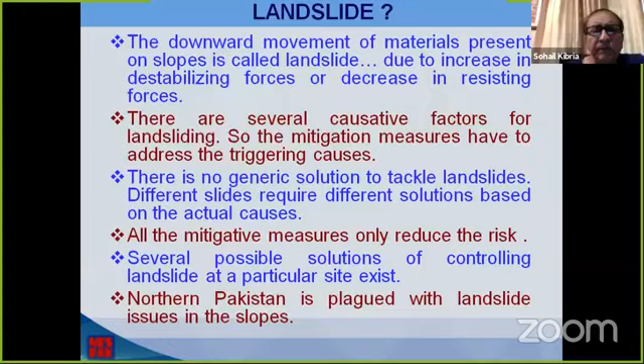In soils, the resistance is composed of the force normal to the plane. In soils, we have some additional component because of the cohesion in soils also - the soils which are cohesive also take part. In a nutshell, we call the interplay of cohesion and angle of internal friction as shearing resistance.

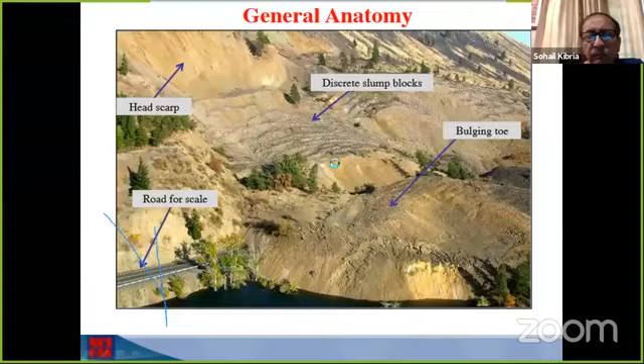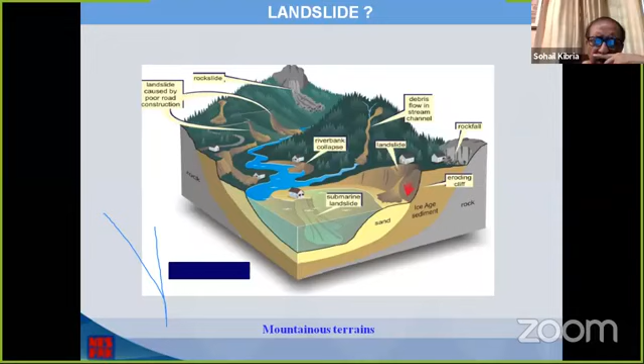Here you see debris flow, in which the moisture content is fairly high. It could contain coarse particles or finer material, or a combination of the two. It is possible in both cases, but the moisture has to be very high.

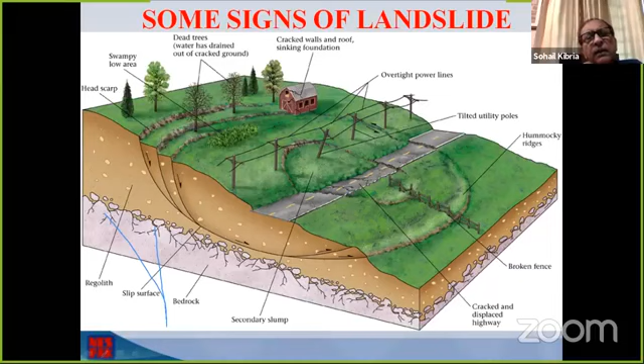So here you see rock, with soil material, alluvium or colluvium above it. This is technically called regolith, along with the slip planes, etc. This is a very brief summary of how we can identify slides at the site.

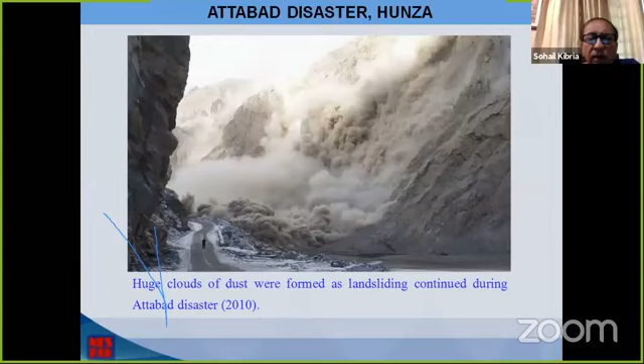In this slide you see a disaster which happened back in 2010 at Attabad. Huge clouds of dust were formed due to landsliding in the Hunza River, and the river was literally blocked, resulting in formation of a big lake. Later, some sliding also took place again in 2019.

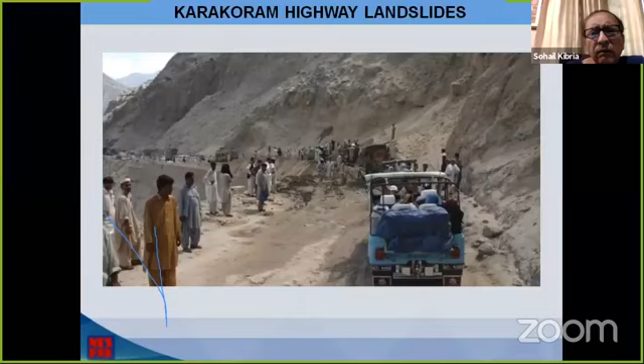Along the Karakoram Highway, which is hundreds of kilometers long, 900 kilometers long, starting from the low point, some landslide areas are very long, very complex and complicated. Some areas are kilometers and kilometers long, and the sliding takes place in long reaches there.

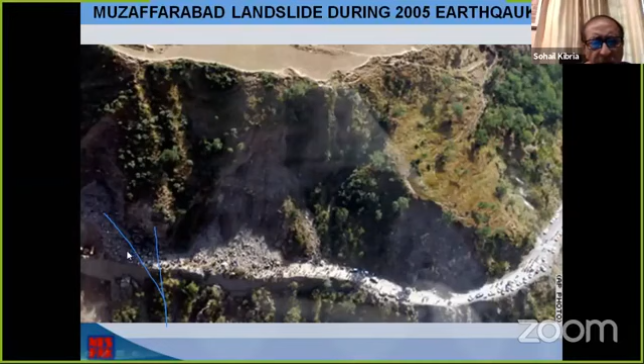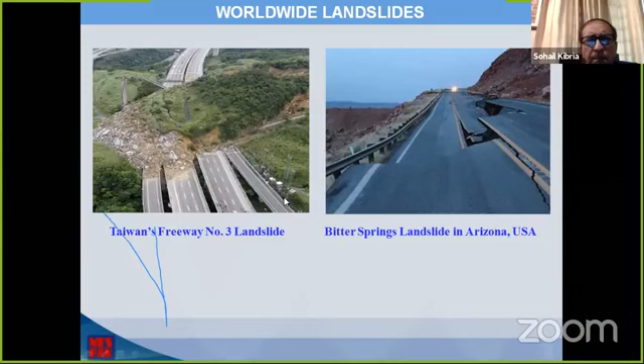If we look at the global index of fatality of landslide globally, we can very easily see that here, this is Asia, this is India, this is Pakistan, and here you see.

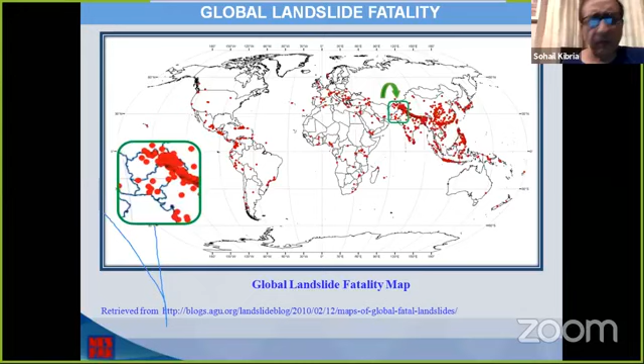Here is a status which was gathered in 2010 comparing the number of fatal landslides in 20 or 25 countries. So Pakistan is number 6 here. In the global fatality status, we are number 6. Number 1 is India. China, Nepal, although a small country, you can see it is having very weak rocks and very weak geology. So for that reason, this is a highly seismic, highly landslide area, and a lot of sliding takes place because of seismicity also. But that is only one factor.

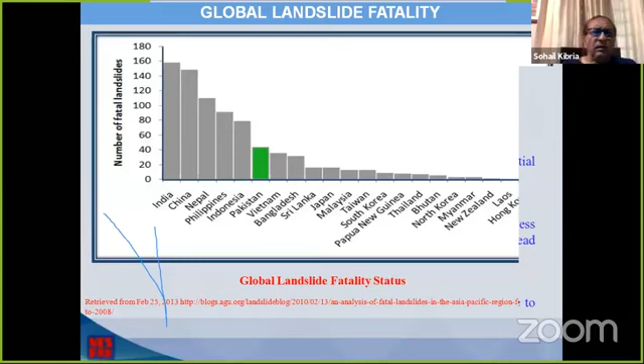So just talking of it, it's not a new issue. It is an old issue. And so many theories have been developed, and so many cases are there in the literature. And every time some new sliding takes place, we have a learning lesson. There are now ways and means, protocols for investigating the landslide, for studying them, for analyzing them, and for giving good solutions. There's a lot of improvement in the design methods, in the construction methodologies, in the mitigative measures, and in the materials also, and the schemes for mitigation that we are using.

There is an increased role of instrumentation also in the landslide domain to find out the actual behavior of the ground, which is subject to movement. What happens to it? What kind of movement? What pressures are there? What pore water pressures are there? So landslides are not always because of natural reasons like heavy rainfalls or snowfall and earthquakes, erosions and differential temperatures, but also because of anthropogenic reasons, which are man-induced, because of our own activity on the planet Earth.

We, for the development works, cut sometimes, we place fill loads at places, we blast, we sometimes remove load from the toe of the slopes of mountains, and sometimes make structures and add weight on the heads of the slopes. We devegetate the ground sometimes. So these are the anthropogenic reasons which slowly trigger the landslides.

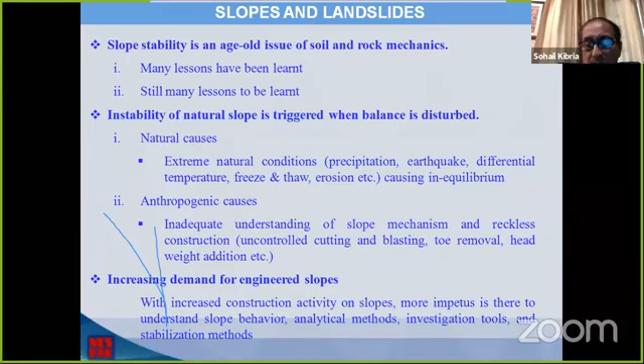Taking care of water, that is draining the slopes from the surface and from the inside, improves the stability against sliding tremendously at relatively little expense. If there are excessive movements because of certain reasons, of course, that will result into deformation and sliding, and a lot of loss to the property and to the lives could be there.

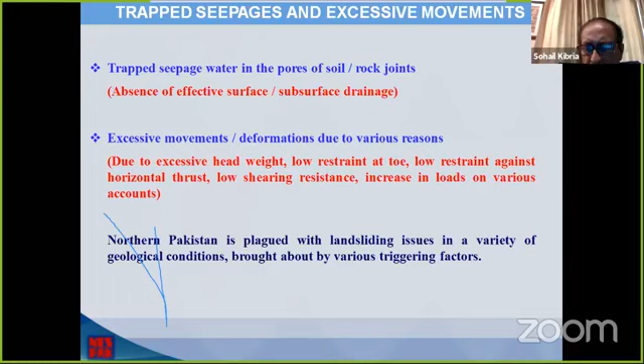Let's have a look at different types of landslides which we come across in our practice. One is the rotational system, in which the failing mass shown in figure A has underlying either a circular or a part of a circle or a curvilinear surface in which some rotation is there. Material moves from here, this head scarp, and accumulates here, causing some bulging and flows down. And in contrast, there could be a planar translational sliding also, depending on the materials, like this, a plane surface.

The deep rotational failures are a characteristic of cohesive soil. The more the cohesion, the more will be the rotational tendency. The materials which are having very little cohesion and predominantly higher angle of internal friction, the frictional materials, tend to have translational failures which are generally not deep-seated.

So similarly, if we have rocks there, in figure C, you can see blocks disintegrating because of the weathering action. Here, steeper slope, rock at steeper slope, falling down by disintegration. This is rock fall. But while falling, if the rock fragments turn also, you see, they topple also. So this is toppling.

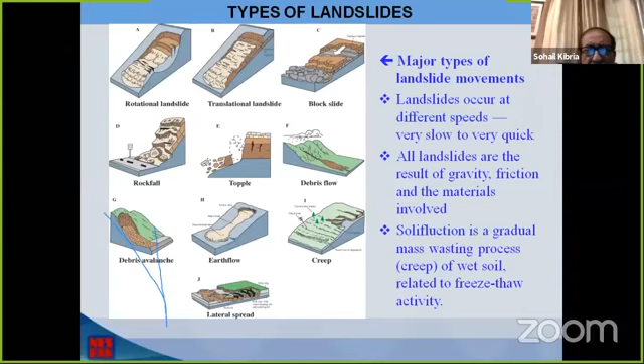So here you see the movements of sliding varying in speed, from left being slowest to the right being fastest. So solifluction and creep slow, slumping after it. Here, lahar and mud flows. The volcanic material when it flows with high moisture, that is called lahar, and this is a volcano here. Debris flow, material containing coarser fragments but high moisture. And here we have fast movements in rock slides, rock falls, and sometimes rock avalanches. Avalanches are very high speed phenomena.

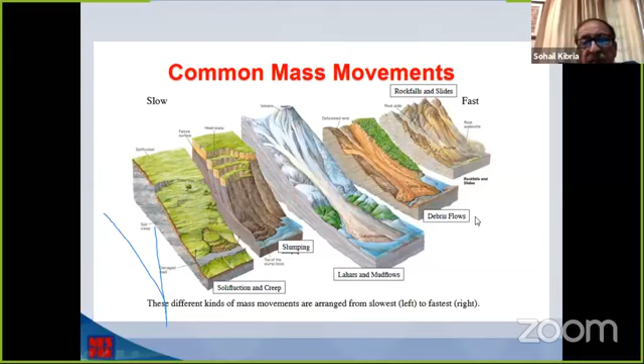There's a view of the solifluction. You can see it's a slow movement. In snow and ice, this is primarily where it takes place.

Whenever we add weight at the toe, we stabilize the slope. Whenever we remove weight from the head, we stabilize the slope. And whenever we do the reverse, that is whenever we add weight here and whenever we remove weight from the toe, we destabilize the slope. This is a very common principle which should be kept in mind.

Whenever we take care of drainage, whether surface or subsurface, we stabilize the slope. Whenever we close our eyes on the drainage issues, as in Murree, the controlling department, they have closed their eyes. They don't even keep the open drains open. You see, it's a very simple thing. If you keep the open drains, naliyan, open and running, they will be draining water and they will improve the stability of the slopes.

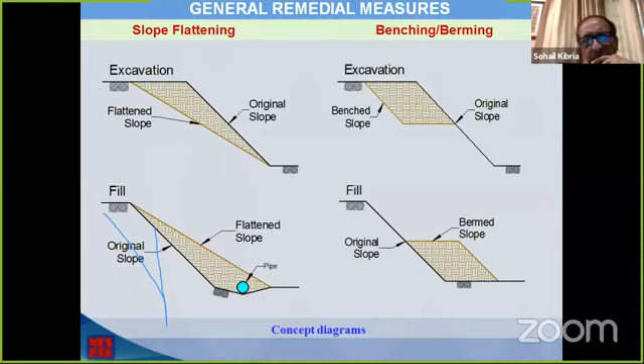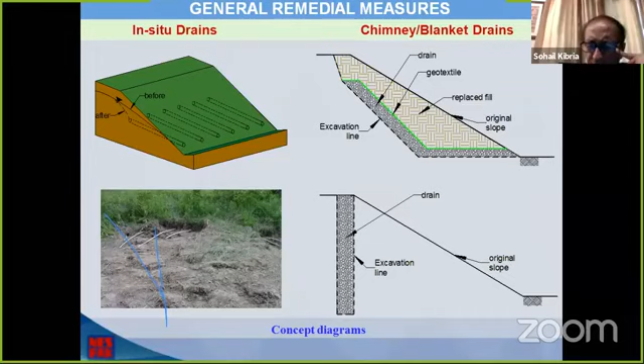The question is, can we stabilize the slope by using some kind of vegetation in alluvial soils? Can it further enhance the stability? Well, the vegetation will generally improve stability depending upon the depth of penetration of the roots, only to the region up to which the roots have penetrated.

Many areas in our northern parts have different kinds of mechanisms, where deep-seated failures are likely. The factors of safety for deep failures are very low, so there the vegetation will not be that effective. But in general, in areas in which the slopes are not very steep and where the drainage is taken care of, the vegetation does help.

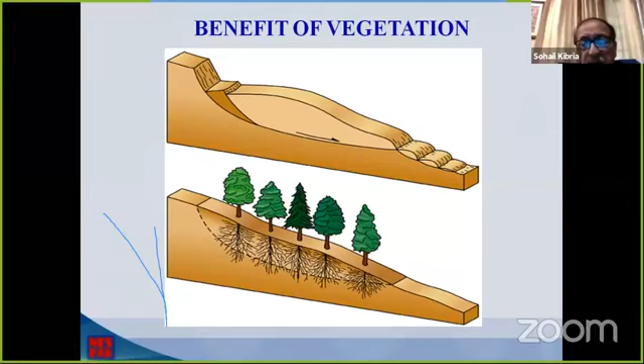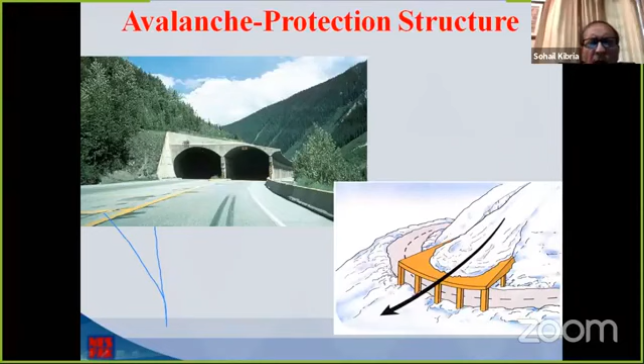If you have seen in the Murree area, by the roadside there are several walls which have slid down over time. The simple reason is that their bases were placed in unstable mass. So we have to place them in the stable mass. If that is very deep, that's another story. Then we can think of some other solution if going that deep with this system is not possible.

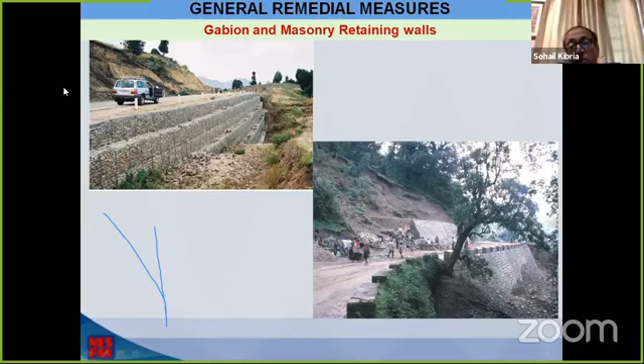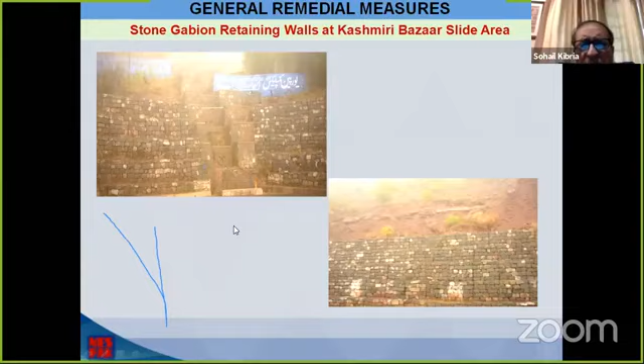So here you see a different kind of wall. You can see a kind of drain here in the retaining wall. This is called a step drain, a cascade drain, to drain the water from the upslope to downslope areas. These kinds of drains are very effective. And whenever we make a retaining wall, we must provide some holes in the walls.

They're called weep holes, because water flows along paths of least resistance in sloping ground and tends to find its way, and when there's a wall, it will stop, and pore water pressure starts building up, reducing the effective shearing strength of the soil. So the effective way is to relieve the pore water pressure by providing weep holes.

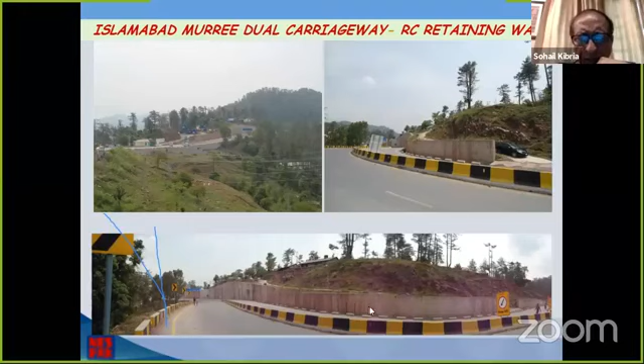And here, a view of different locations of the Islamabad Murree dual carriageway, the new road which is built on the right side of the mountain. The old road is on the left side of the mountain. So at different locations, you can see these retention walls are there to take care of small slides.

Let's have a small overview of the general remedial measures for a variety of situations. As I've earlier said, a typical landslide after its study will require certain specific measures. But we must know what the underlying causes are. First of all, that is important.

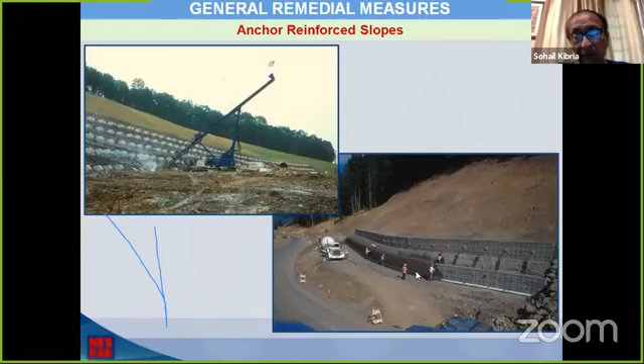So here you have a question on the board and a comment. Yeah. Please, can you read that for me? Can we stabilize the slope by using mechanically stabilized earth walls, MSE walls, instead of accumulation of weight at the toe?

So going back here, this is a mechanically stabilized earth. This is one system of mechanically stabilized earth in which we have used reinforcement, you see. There are many types of MSE walls. This is also an MSE wall. But an MSE wall will require its own construction. It is fill, it will require its construction. And behind that is the unstable formation, which has to be stopped. Yes, reinforced earth or mechanically stabilized earth construction has a lot of scope to give stability in sloping grounds.

It's all right. Any other question or some comment, Tahir Saab? Hello? There is a question from engineer Siraj Ahmed. Why do we use weep holes in retaining walls? Kindly explain and define the actual effect of weep holes on a retaining wall.

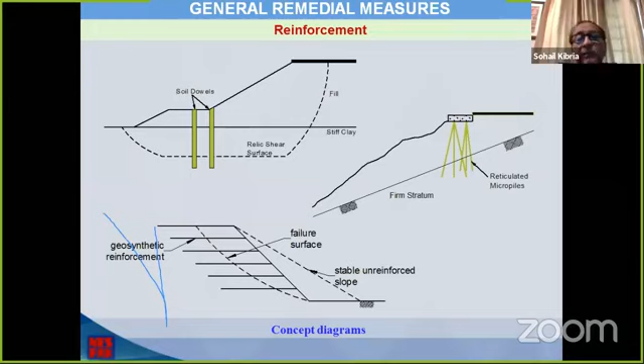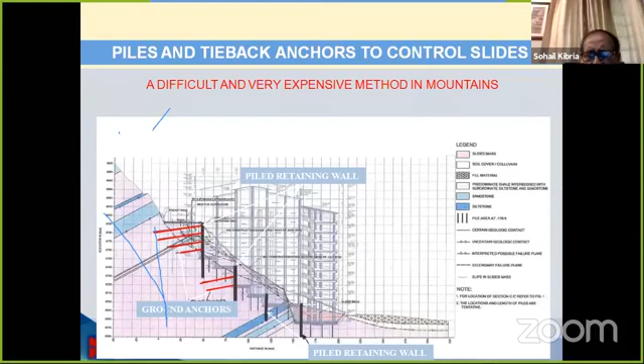So in Jika Gali, basically there was a combination of reinforced earth and large diameter piles provided at the toe, which gave stability to the mountain. And here you can see the construction of reinforced earth. So this is partly also an answer to the earlier question, can we use mechanically stabilized earth to stabilize the landslide? Yes, as we have done here.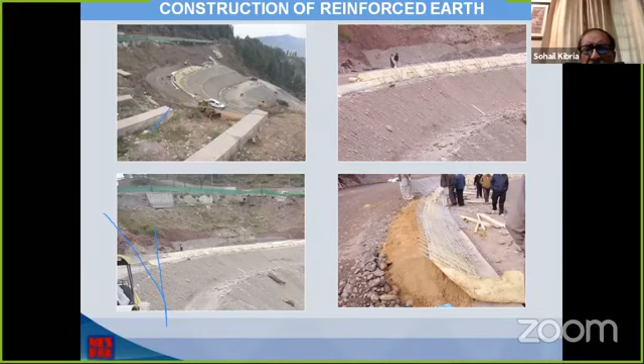After construction, you can see the finished face of this reinforced earth system at Jhika Gali. So this is a reinforced part. This is supposed to grow vegetation in due course of time, provided its maintenance is also done by the concerned staff. You have some signs of vegetation here, but it requires maintenance, because if there is some erosion of the soil present on the top, right under the mesh covering this slope, it has to be made up.

And the lower part is unreinforced, and wherever there is a bench here, there's a drain running there also. So that gives stability. The drainage of the slopes is important.

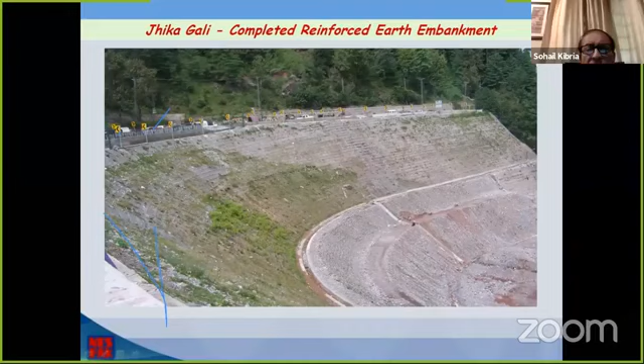While I'm discussing various possible means to stabilize slides, I would also like to emphasize that in this business there are a variety of combinations and a lot of money is involved. So what engineers do is reduce the risk from the high value before construction to a lower value. It could be further lowered at the expense of very high cost. So in landslide projects, it is accepted that some little risk will be left, taken care of by periodic maintenance and inspection.

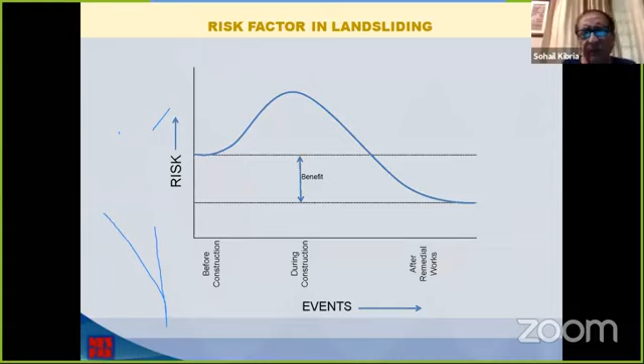No sane engineer would try to reduce the risk factor to so-called zero in this kind of work. I think this is also true in other branches of civil engineering, like flood management, design against earthquakes, design for tornadoes and hurricanes. We accept a certain level of risk, and then we design for that. So similarly in landslides. And here, this is a trade-off between risk and cost.

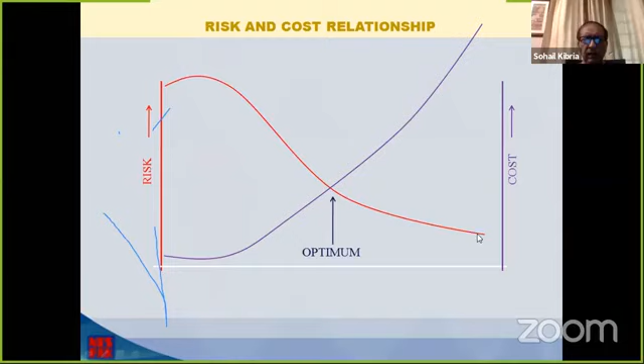If we incur less cost, this purple is for cost, we have high risk, but if we go on increasing the money on designing and providing good mitigative measures to arrest landslides, then the risk factor will be reduced to a low value. That very low risk can be effectively taken care of by a system of periodic maintenance and inspection. This is recognized the world over. And in Pakistan also, we are going with the same system, because otherwise landslide mitigative measures would become very, very expensive.

So is there some question till now? Any further question? No?

No question yet. Okay, go ahead. Please go ahead.

Like in other civil engineering works, whenever we design on flat or sloping ground, we need geotechnical investigation and studies. Similarly, on a landslide area, on sloping ground, we have a system, a protocol. First, reconnaissance is carried out, supported with satellite imageries, GIS studies, then physical studies of the site. Topo survey is very important, then actual drilling, field testing, some geophysical surveys like seismic refraction surveys, etc., and appropriate laboratory testing to find out the index properties and shearing strength attributes.

One important thing is that now we have been using this practice here in Pakistan on landslide areas, that we instrument them and monitor them for a sufficiently long period. In my experience, we monitor such slopes for 12 to 18 months in general. That's a reasonable period in which we cover, if not two, then one wet season also. And we see the order and trend of movements, and the trend of accumulation of pore water pressure during the rainy seasons, or when it is dry at the site but becomes wet at a distant location and seepages travel towards the site. So the piezometric observations are quite helpful there.

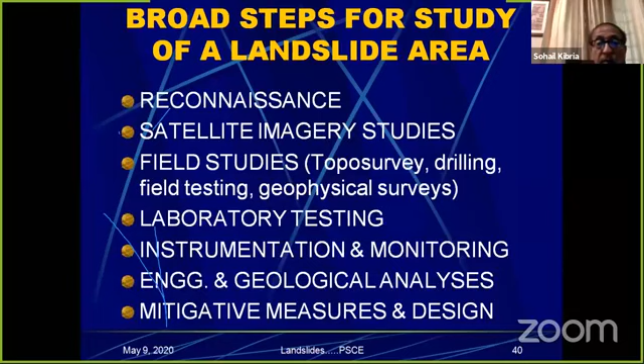Talking of slope stability measures, when we have to design a measure to control a landslide, we have to carry out stability studies - how much unstable it is, how much mass is involved, and then decisions are taken on what should be done. So there are various methods to ascertain stability. As for general slopes, for landslides also, the very well conventional, time-tested, recognized method is the limit equilibrium method, in which we establish the equilibrium of either forces or moments, and the sliding mass in general is divided into wedges, into slices, to carry out the analysis.

On the other hand, there are now some later methods with finite element and finite difference methods also, which are involved now. They're said to be very accurate too, and they fit into a variety of geometric conditions. And when we have to find out the behavior of slopes under earthquake, it becomes important to carry out a dynamic analysis and to find out deformations.

Sometimes when we have to see the stability of the slope by static methods using the limit equilibrium approach, we incorporate the effect of earthquakes by an equivalent pseudostatic force. This is called pseudostatic analysis. But the results of pseudostatic analysis, in our experience worldwide, are not considered that reliable. It has been established that even if the pseudostatic analysis gives a low safety factor like 0.7 or 0.8, if the dynamic analysis on such slopes indicates that deformations under earthquakes will not be excessive, then the low safety factor of pseudostatic analysis is not given any importance. So this is the trend and a shift in thinking in the profession.

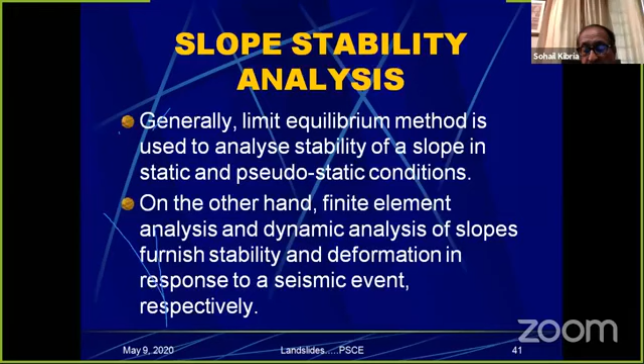So in small words, stabilizing forces over the destabilizing forces or moments is the factor of safety. The factor of safety has to have a reasonable value, typically 1.5 in static conditions, considered reasonable during the performance of the structure. Under special conditions of earthquake loading, a factor of safety of 1.1 as the ratio of forces or moments is acceptable. Generally, this is in the general analysis.

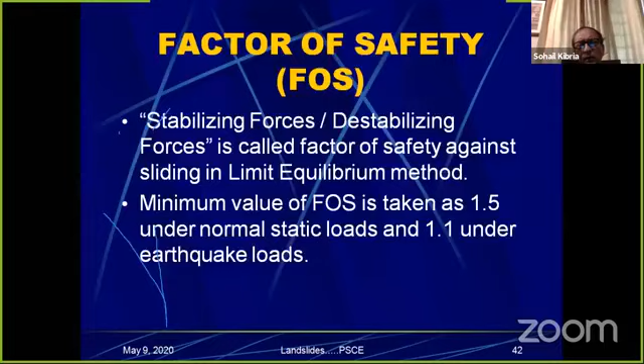For methods of analysis, they used to be carried out by hand. The various longhand methods to find out the stability of slope include methods of slices - there have been Bishop's method, Price and Morgenstern methods, Janbu's method, and many other authors that have done a lot of work. There is a difference between them based on the difference in the assumptions that they make.

So here you see, if it's a slope, it is divided. If we consider this slide, we can define a plane and find what is the factor of safety of that plane. We divide the slope into slices, into pieces, and the weight of each slice component can be divided into two parts - one normal to the surface, and other facilitating sliding. Similarly, at the sliding surface, it shows the shearing resistance upward and the normal resistance because of the weight. So taking moment, it's very common to take moment about any point - one can take a moment about this point or that point, and find out the equilibrium, and that's how the factor of safety is calculated.

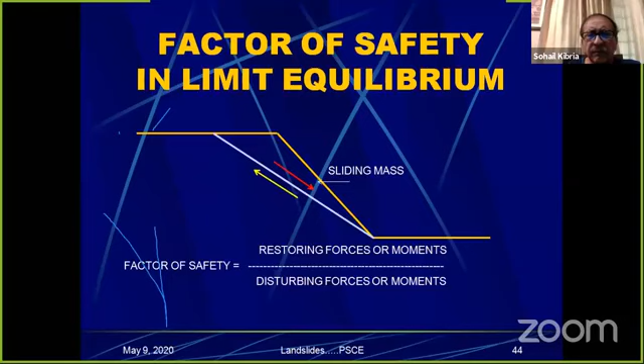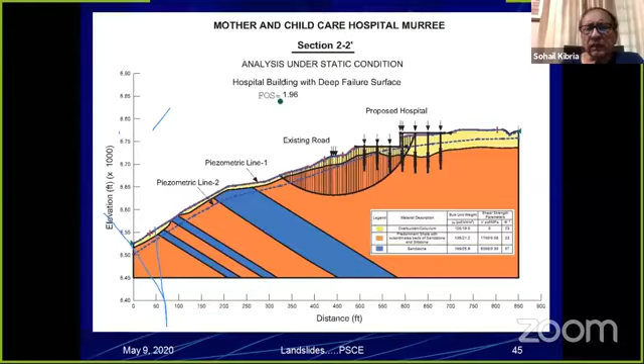Having known those two points, one can define the trajectory of the slide. A kinematically possible failure surface can be developed. This is how we can define the route of the slide, knowing the two points at the site, assuming that to be circular. So that is a very good, effective way.

Now fixing a factor of safety of 1, because factor of safety of 1 is just that factor of safety which is responsible to give equilibrium. The disturbing forces are just equal to the stabilizing forces. Even theoretically, 0.1% disturbing forces beyond that can trigger a landslide. So factor of safety 1 means we are just on the threshold of stability.

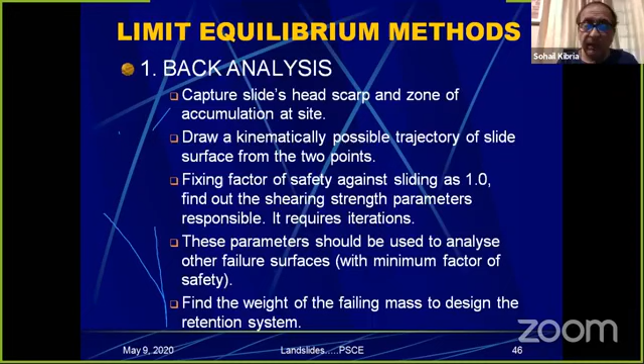So it is important to find out the weight of the failing mass, because the lateral force generated by the weight during sliding is what we have to consider while designing the mitigative measures.

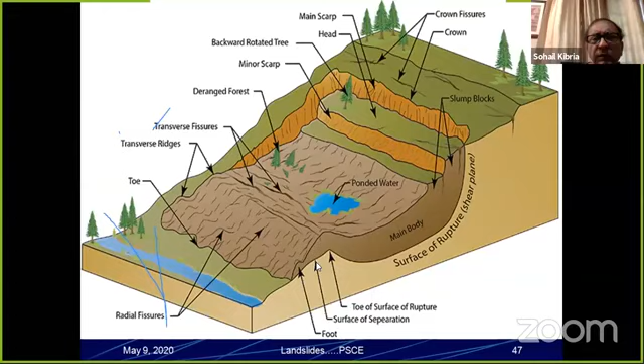Now, that was the back analysis. What about the routine stability analysis? In routine stability analysis, we have the geometry of a slope. We carry out some field and laboratory tests, we find out the appropriate controlling shearing strength parameters, and then we run limit equilibrium analysis or finite element analysis, whatever has to be done. We find out the factor of safety, and we calculate what is the lowest factor of safety for which

surface. So the weight of the soil within that surface, which is generating the minimum factor of safety, is the weight of the sliding mass. If we have to design a restraining measure, that restraining wall or piles or whatever should be able to take the lateral thrust of that much sliding mass corresponding to the minimum factor of safety. Then it will be easy to design the mitigative measures. So in routine practice we carry out both static and pseudostatic analysis by the same method.

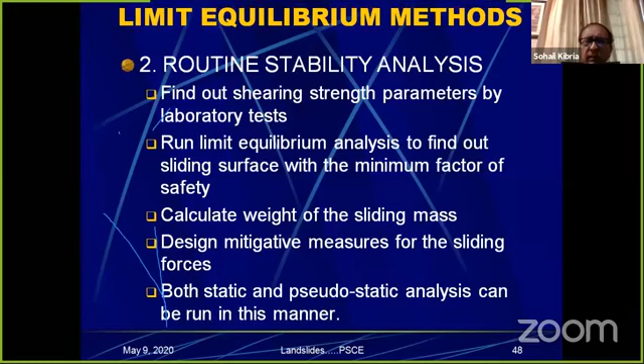And as I told you, in contrast to the limit equilibrium method, finite element methods are now also alternative approaches, and they are considered to be accurate, versatile, and have fewer assumptions regarding the failure. But many engineers, even to date, consider them a bit cumbersome, and they don't want to go into numerical modeling. That's why the state of the art in the profession in the landsliding business is still the limit equilibrium method. Even today, its results are considered fantastically true, and it is more understood by people.

The finite element method is more software oriented, and one main objection to using such methods is that they require accurate determination of the ground properties in large number. A lot of soil investigation, a lot of realistic laboratory testing, and a lot of representative soil and rock parameters have to be there. So just comparing.

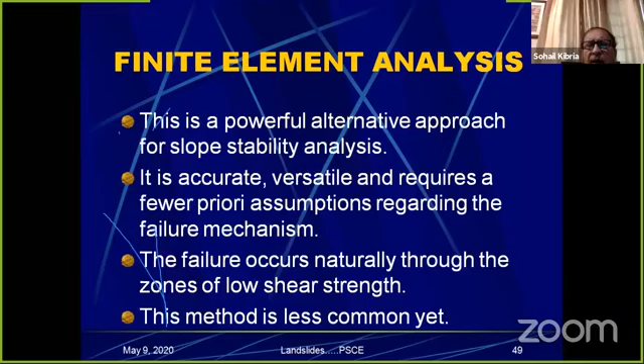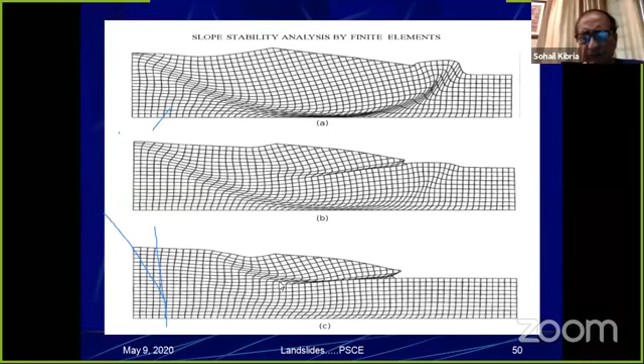So, just juxtaposing a slope with finite element analysis and a slope with routine limit equilibrium failure surface analysis. Some studies have been carried out, and the results are quite comparable. So whatever one wants to do, both are acceptable in the profession.

About dynamic analysis: when we have earthquakes, like in our northern part of Pakistan, where we have a lot of seismic activity, in earthquake-prone areas we are more concerned about the deformation in addition to the sliding stability. Unfortunately, limit equilibrium methods only lend us a pseudostatic method, in which we approximate the earthquake forces with equivalent static forces. But that leads to a factor of safety which is considered doubtful in the profession. Even a value less than 1 is considered acceptable by top experts.

For such cases we always go for a full-fledged dynamic analysis, and there are many methods for dynamic analysis. Sarma's method is very popular, and not only do we use it on computer, some shortcuts for longhand evaluations of Sarma's method are also available, in which one gets a fair idea of the deformations which can take place. If they're acceptable, fine. If they're not acceptable, one can take measures to control the deformation by some retention measures, by proper mitigative measures.

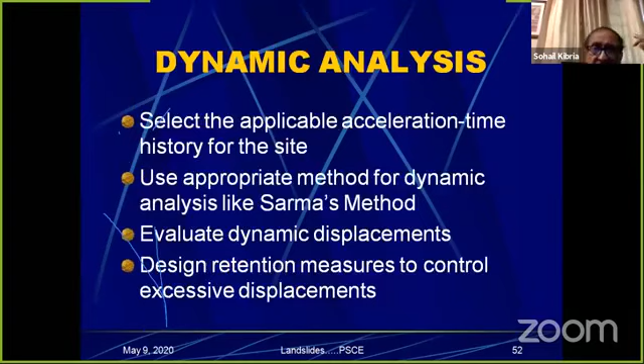Yeah. So, any question up to on this topic? Nothing? Right, there's no further question?

Is your lecture finished now? So far, no. Okay, you carry on. If there is a question, I will let you know. Please do let me know. It is about 40 minutes past 3 p.m. Up to how much time I should keep delivering? Well, as you told us that it would be about 90 minutes lecture, so I think you still have 15 to 20 minutes more. Okay, thank you.

So I'll have to go into brevity. Just giving you glimpses because I want to make you aware of many important things related to landslides. As I told you, now the profession of civil engineering is shifting a lot towards performance monitoring. It is a performance-based design which is getting more importance than our conventional design. So similarly, in landslides, we ought to see the performance of the slopes. How do they perform? Not only to design the mitigative measures, but also after having designed the mitigative measure,

how they are behaving. So that adds to our professional knowledge and also enables us to design the measures symptomatically, according to the symptom. Where there is some problem, we provide the mitigation measure. Where there is no problem, let it go. So a variety of equipments or instrumentations which are done are listed here.

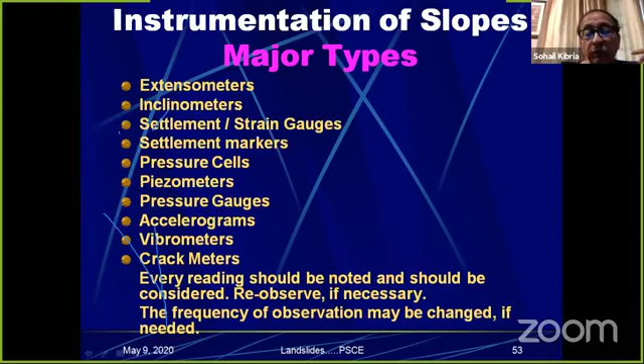So sometimes the readings of some of the instruments look to be odd. So I've just added here that every reading should be taken, and if one finds some doubt, the reading should be repeated. And the higher the susceptibility of movement of the ground, the closer should be the frequency of observations. I mean, if some movement is taking place, daily readings should be taken, maybe 2 times a day. If the movements are very little, then maybe once a week, or maybe one reading after 2 weeks.

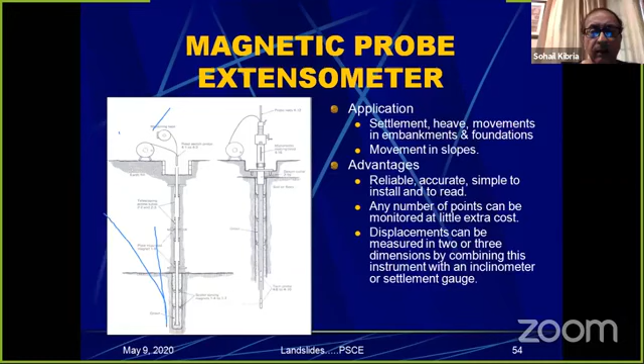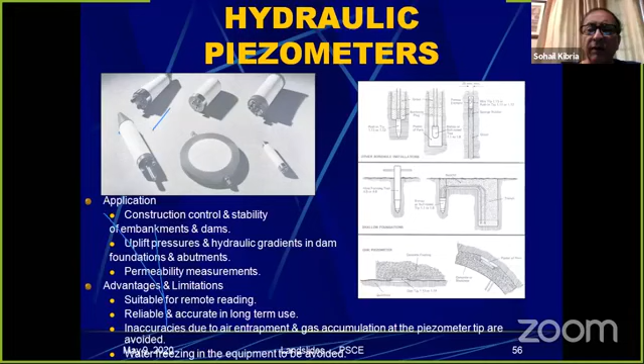So there is another type of equipment, inclinometers, which gives the indication of the inclination by measuring the XY values. Piezometers, in which we measure the pore water pressure. Very important to find the pore water pressure; we use it in our analysis also. So many kinds of piezometers. Here I show you a plot of the extensometer actually recorded at Mother and Child Care Hospital, whose picture I was showing you earlier.

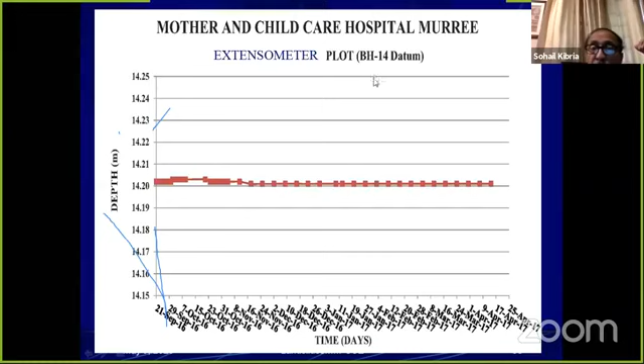So this is a plot of about 6-7 months. So there is no significant movement recorded at this particular location of borehole 14. So very good. This is how they give us the indication of movement.

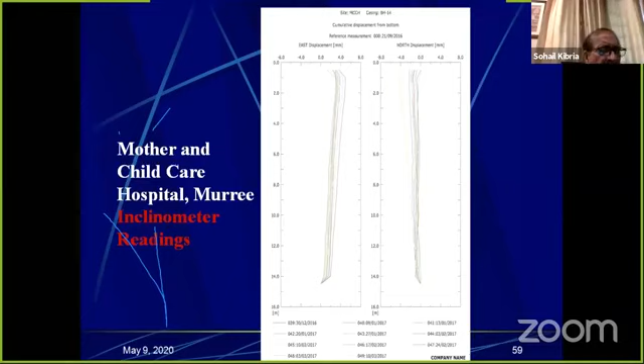I would also like to share with you one important field in landslide studies which is getting international recognition: the development of landslide hazard zonation maps. As I told you, I was myself involved a few years back in a very ambitious project ordered by the then Chief Minister of Punjab. He was very keen to develop Murree. So it was decided in a very big meeting that we should have a full-fledged landslide hazard zonation map of the Murree area, on the pattern of what is being done by other countries where there is a lot of seismic activity and landslide activity.

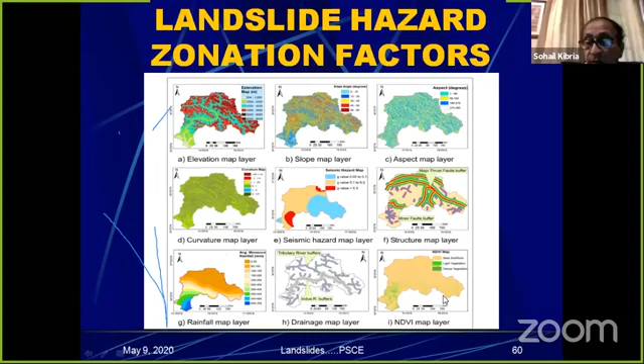Rainfall intensity map, because if the area is relatively unstable but rainfall is scarce, it will not be that serious compared to an area of high rainfall. Drainage map: if the drainage is good but the area is less stable, even then it will be reasonable. NDVI map. So cumulatively, on the basis of these 9-10 factors, a landslide hazard zonation map has been plotted for that particular site. And you can see here, less than 25%, 26 to 45 moderate; red areas are very high hazard, then high, moderate, and these areas carry low hazard.

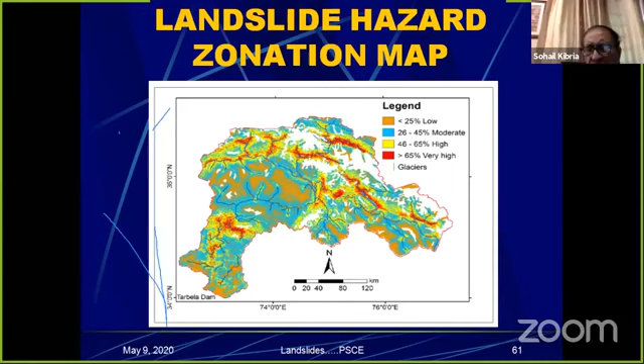So this is the purpose: in a landslide prone area where the landsliding potential is spread erratically, particularly after that big Kashmir earthquake, we should be able to find out the areas which are relatively safe, where we can allow general construction with little expense for mitigation, and the areas which should not be used for construction at all. Some areas will be red areas. Why carry out construction there? Because a lot of money would be spent. And the areas of intermediate hazard, we can spend some money and make them usable. So this is another area which is finding its place in landslide studies.

I know that the time is less, but I'll continue up to 4 p.m. I have 10 or 11 minutes left.

So first of all, I'd like to quickly show you a few glimpses of a good study carried out some years back on the landsliding areas and the mitigative measures designed along the Karakoram Highway. There are some very notorious landslides, and some are kilometers and kilometers long. Now, as you know, KKH is a very important route which links Pakistan with China, and it could be a future trade route, and nowadays the CPEC project is also linking with China. So whenever we construct roads and civil engineering works in mountainous areas, we do come across landslides. The underlying factors are different.

What are the main characteristics of the Karakoram Highway? We have very high mountains, and they're barren, no vegetation. Earlier, somebody asked about the role of vegetation. The mountains there are almost devoid of vegetation.

And not only are mountains high, quite often the slopes are very steep. So that also adds to instability. And they are subjected to extreme weather conditions. There's snowfall, there are differential temperatures. And as a result, the rocks have become jointed in due course of time. And the deposits on the steep slopes at places are very unstable.

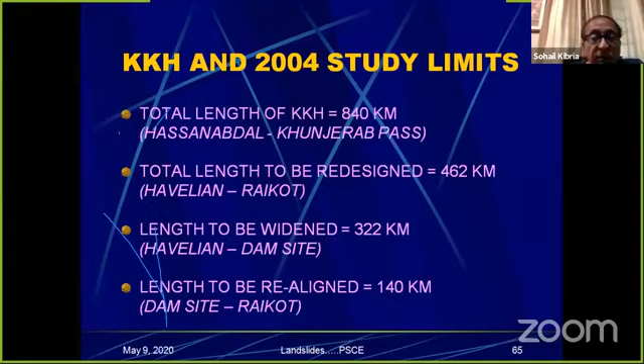This is not a very clear map. I should show you this one. So here you see, the study area was Havelian to Raikot, Havelian to dam site and dam site to Raikot. So here at the bottom, Havelian, traveling over Karakoram, many areas, Shinkiari, Balakot, Thakot, etc., till the point you reach here, the dam site. So this portion, 322 kilometers, was considered for redesigning, for facilitating movement of construction machinery, to widen it sufficiently, a stable stretch.

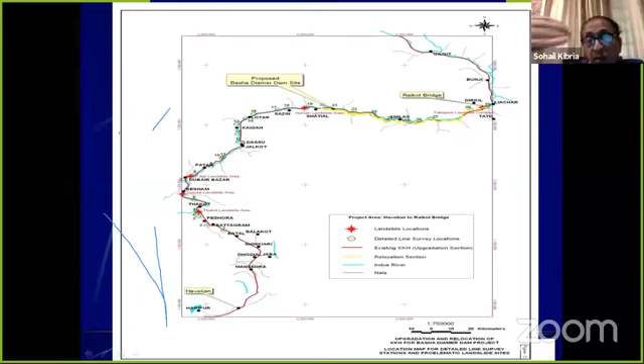And beyond that, you can see a yellowed portion. The yellowed portion is that portion of the Karakoram Highway which will be submerged after construction of Bhasha Dam. It will be submerged in the lake up to this point, Raikot, where there is a bridge. So in this yellow part from Bhasha Dam, in the lake part, the road had to be lifted up at a higher elevation. So landsliding studies from that angle were important.

So the basic underlying requirement was that where the road has to be widened, it must be widened from the existing 4.5 meter width to 7 meter width, an addition of 2.5 meters, to allow for movement of machinery for Bhasha Dam. And in view of future submergence of Karakoram Highway in the reservoir, from dam site to Raikot Bridge, the road has to be lifted and realigned at a higher level.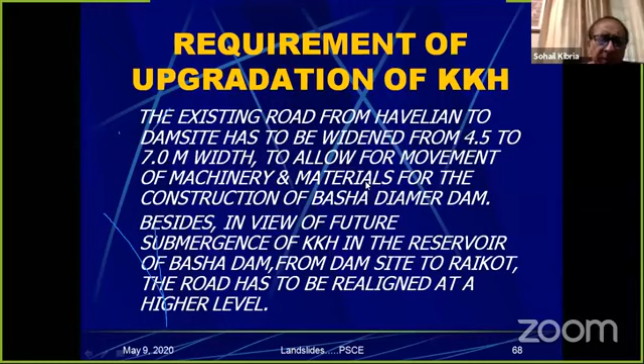So there was a basic philosophy, a lot of discussion. It was a JV, NESPAK, ACE, and a top expert from Kent State University was also there, a Pakistani professor, Professor Dr. Abdul Shakur. He was here in Pakistan during the study phase. And we carried out a number of site visits in addition to the office work and some testing and laboratory work. So it was decided as a principle that slope movements have the potential to continue despite remedial measures.

We should accept this. We should not go for a zero risk situation. That was decided as point number one. The second point decided was that landslide hazard can only be minimized with remedial measures. Regular maintenance is also essential, so the remainder hazard will be taken care of by regular, periodic maintenance. It was recognized that the risk will be reduced to such a level that probably no loss of human life could take place.

So excavation in the toe of the slope was decided to be avoided as far as possible in widening. That was the last priority. Don't excavate, as I also shared with you, unless it is unavoidable. Don't excavate in the toe of the slope. Try to provide the widening of the road in landslide areas or in sloping areas on the valley side. Generally, that is better. The most cost-effective solution is desirable.

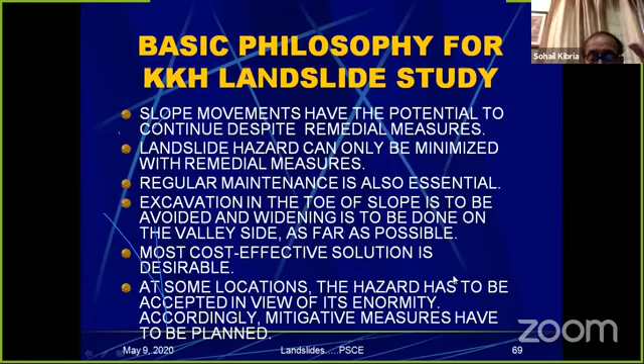So what were the study components for Karakoram Highway at that stage? Reconnaissance, topography, satellite imageries and GIS, detailed geological mapping along the whole hundreds of kilometers, very tough exercise. So here we have a question.

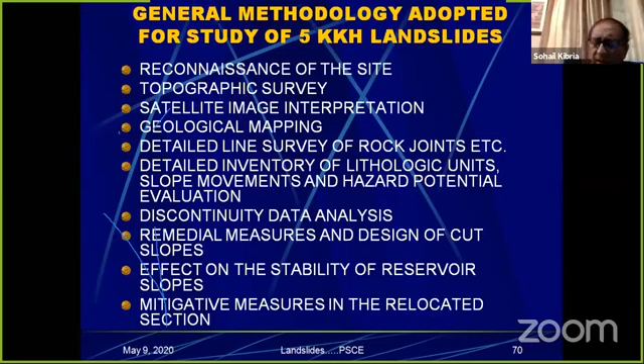Yeah, please. This question has been asked by Asad Iqbal. He's asking, can you briefly describe ground strata in Dam Rycote site? At the dam axis. Hopefully he means that, but he has said Dam Rycote site. Raikot, Rycote site. Well, I don't have the geological picture right now, but I have a geological map. Just a minute. I don't have a deep drilling record right at Raikot right now. I can share that information. Just a minute.

Yeah. Here you see, we have, just a minute. This is the Raikot area. So surface geology, we can read from the color code, this dark purple, this limestone and sandstone, and then we have blues of two different shades. I'm not good in geology. This is some leucogranite and pluton. You see, it's difficult geological terms. So this is what appears to be here. Some kind of granite rock is there, right? I don't have further information on this.

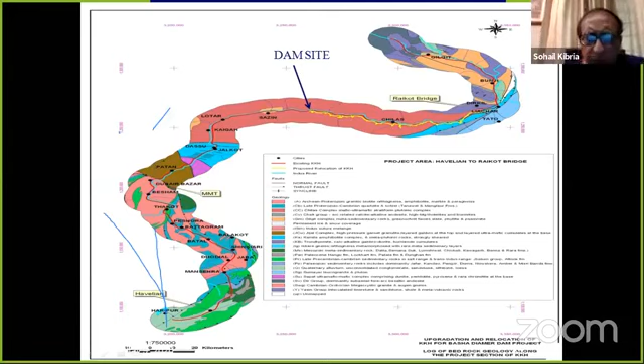And one slide I want to show you to capture the concept about the speed at which the sliding takes place. It has been divided by Cruden and Varnes into 7 categories, from extremely rapid to extremely slow. Extremely rapid would be something like approaching 5 meters per second, which is something like 18 kilometers per hour. Is it fast enough? Can anybody comment? Compared with a car's speed, it is not fast. But from a landslide's point of view, it is reasonably fast. And here you see very slow creep, 1 or 2 mm per year.

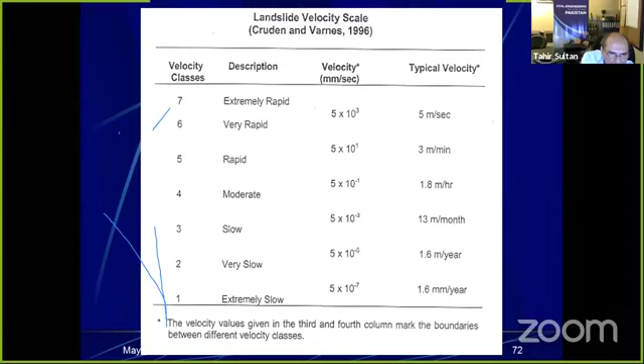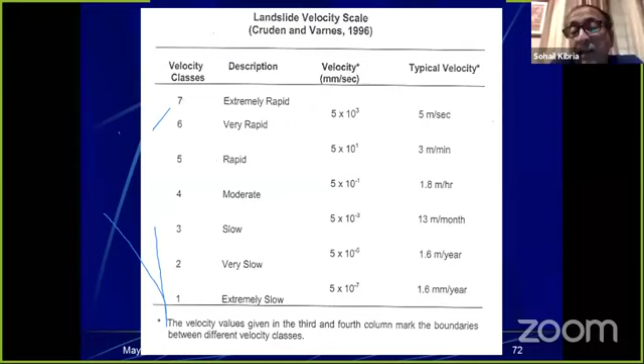We have a question. Yeah, please. This question has been asked by Muhammad Imran Chaudhry. He's asking, landslides due to volcanic activity are some of the most devastating types. Can we reduce volcanic activity? Had we been able with engineering measures to reduce volcanic activity, we could have done that. Human beings have not been that strong in their knowledge and physical might at the moment to fight against the big forces of nature. We cannot control earthquakes. We cannot control tornadoes and hurricanes. We cannot control volcanic activity at the moment.

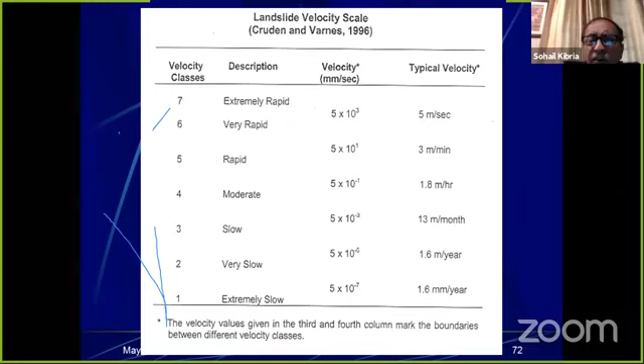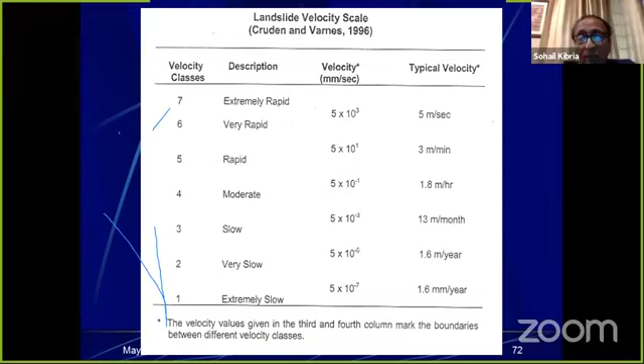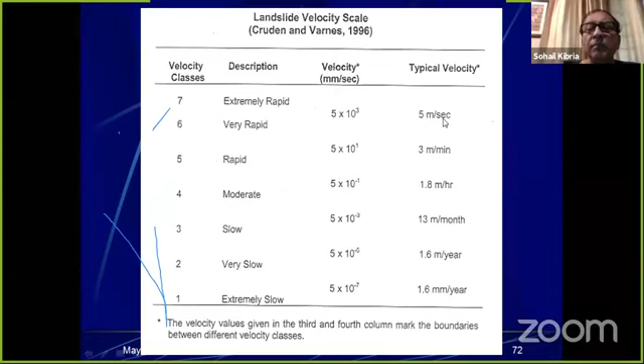80 into 8, divided by 5, roughly 128 kilometers per hour. So avalanches should be defined in our northern part. We do, at some places, have large bodies of snow and ice sliding swiftly at very fast speed.

Steeper slopes tend to continually shed snow because they are steep. So in order for the snow to gain stability, it will slide down and a deep snow layer will form at the lower elevations normally. Studies show that avalanche risk of sliding is at its greatest within 24 hours following a snowfall of 12 inches or more. So if there is a snowfall on such steep mountains of 12 inches or more, the next 24 hours are very vulnerable. One should expect an avalanche.

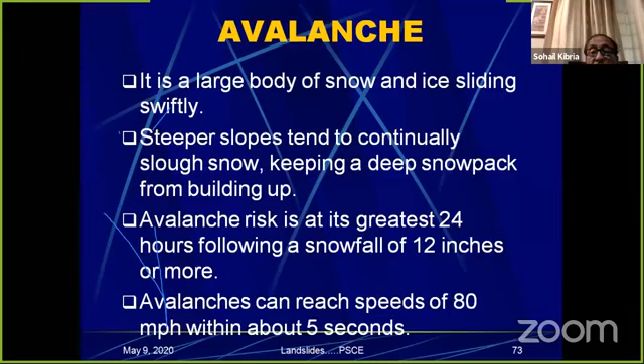I think time is over. Time is up, I should not consume much time. I'm sorry I have to finish it, but I think I've been able to give some basic concepts about the study, analysis, and mitigation of landslides.